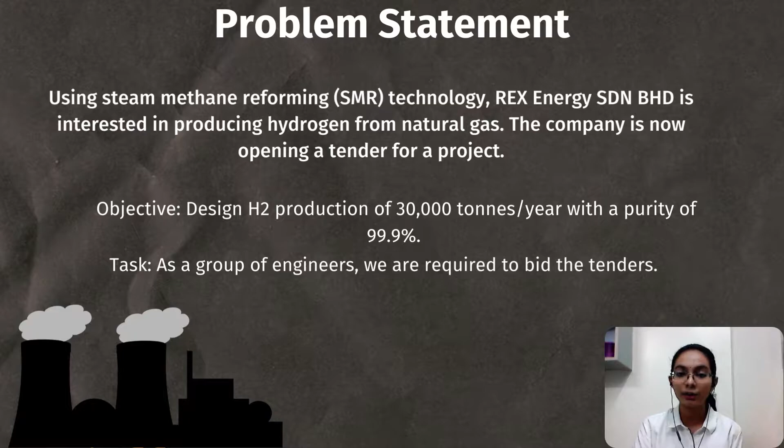Hi, I'm Monroe, and this is our overall system design to meet the specifications set by the company. We decided to use 2 packed bed reactors to produce the desired amount of hydrogen and 2 adsorption units to obtain 99.9% purity of hydrogen. Other unit operations such as heat exchanger, compressor, and valve are used to control the temperature and pressure of the stream so that the plant is working efficiently.

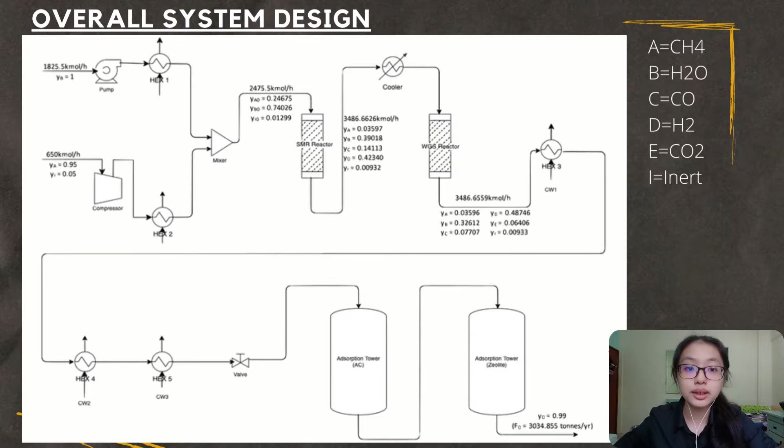In the SMR process, the use of catalyst is mandatory. Nickel-based catalysts assure an acceptably high activity and low cost. Nickel is one of the most widely used active phases in catalytic partial oxidation. It possesses a very high reactivity and low attrition, and can withstand a very high temperature. It also exhibits a good mechanical strength.

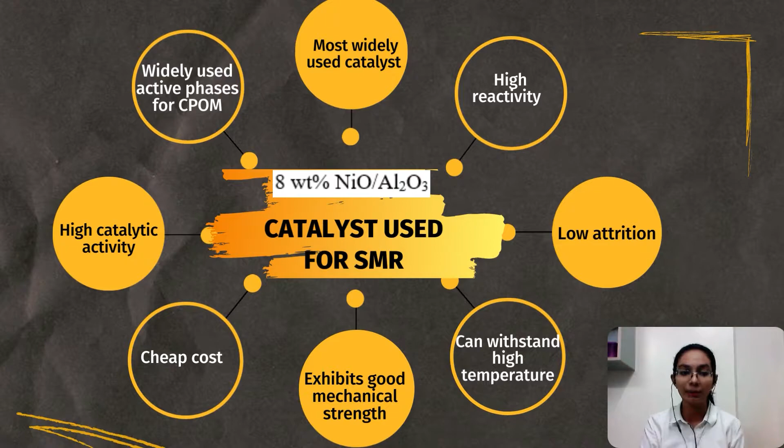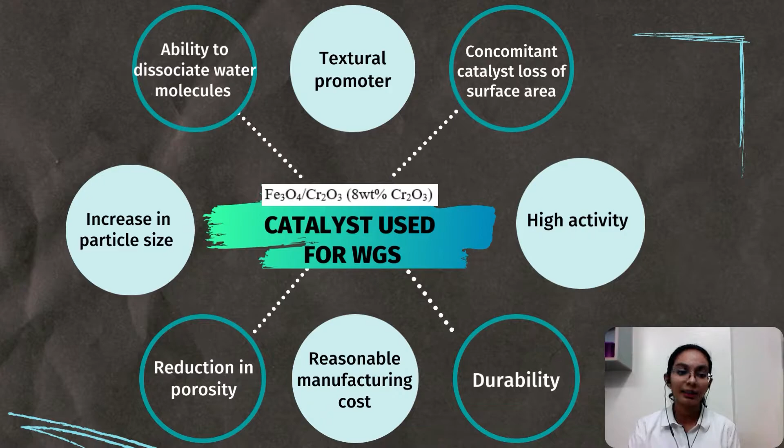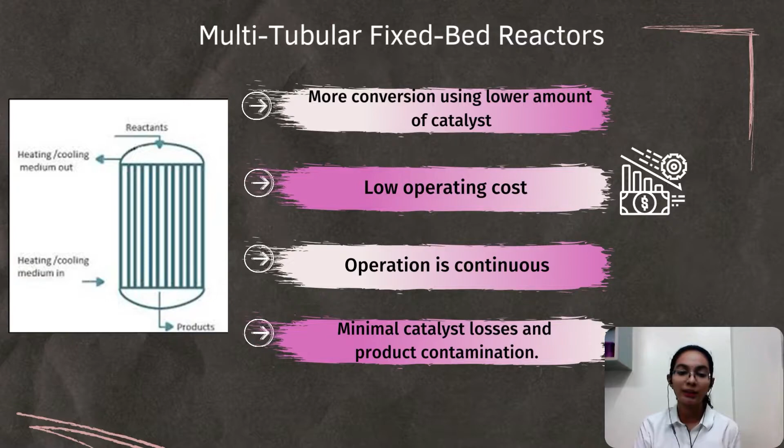The chromium in ferrochromium oxide in the high-temperature water gas shift catalyst has been used as a textural promoter to prevent thermal sintering of ferrous oxide. The ferrochromium mixed oxide catalyst is used because of its high activity, durability, and reasonable manufacturing cost. It also has the ability to dissociate water molecules. And the sintering of this catalyst leads to a lower surface area, reduction in porosity, as well as increase in particle size. The multitubular fixed-bed reactor, also known as the PBR, is used for both reactions because it has more conversion using a lower amount of catalyst, it has a lower operating cost, and the operation is continuous, as well as it has minimal catalyst losses and product contamination.

The strategy is to maximize the selectivity and yield of hydrogen, as well as to minimize the side reactions. First of all, we can increase the reaction temperature at constant pressure, because according to Le Chatelier's principle, an endothermic forward reaction favors a very high temperature condition, and the overall heat of reaction in this process is endothermic. So it requires more energy to be absorbed for the reaction to take place efficiently. Therefore, the methane conversion rate and hydrogen yield will increase with increasing reaction temperature at constant pressure.

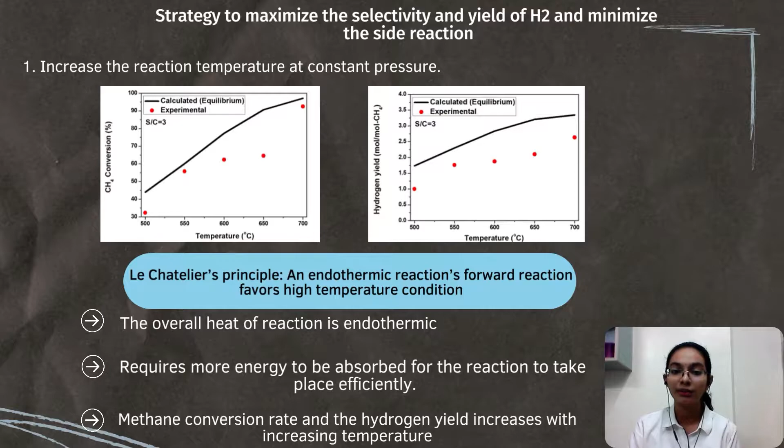Besides, we can also decrease the inlet pressure because according to Le Chatelier's principle, the increase in stoichiometric number in the reaction can be favorable at low pressure because the gas molecules of product are more than the reactant. Therefore, low pressure will favor the forward reaction. So, an increase in conversion of methane and greater hydrogen yield can be observed.

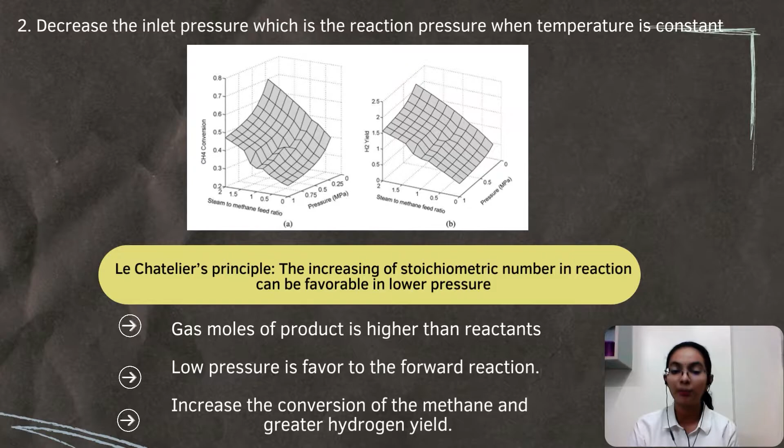Next, we can increase the steam to carbon feed ratio and carbon dioxide to carbon feed ratio because a positive effect on the WGS equilibrium, which favors the production of hydrogen as well as carbon dioxide, can be observed. It reduces the hydrogen partial pressure in the reaction zone, and a pure hydrogen flow rate can be recovered. Therefore, increasing the steam to methane ratio increases the hydrogen production by favoring the reforming reaction.

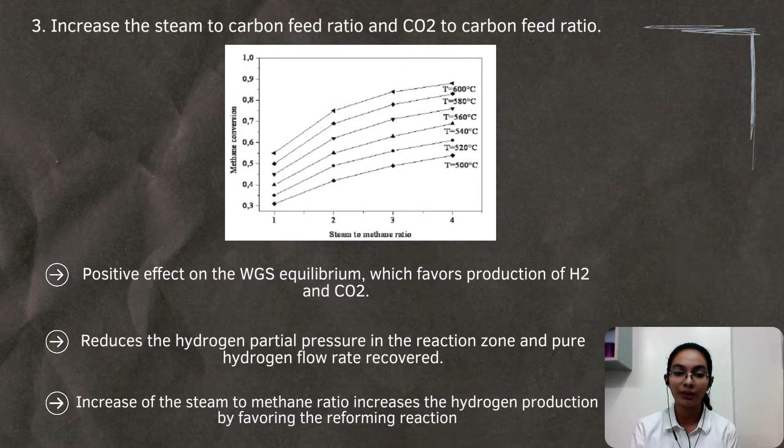So, how does the reactor separator system work for the SMR process? First of all, the natural gas stream is passed through the compressor, and water is passed through the pump. Water must be in the form of steam, and natural gas is heated up to a very high temperature. The hot natural gas and the steam are mixed in the mixer. Then, the methane reacts with the steam to produce hydrogen and carbon monoxide in the SMR reactor.

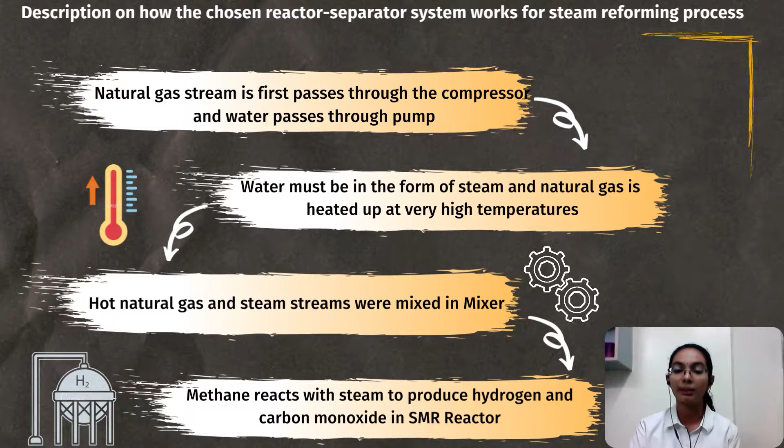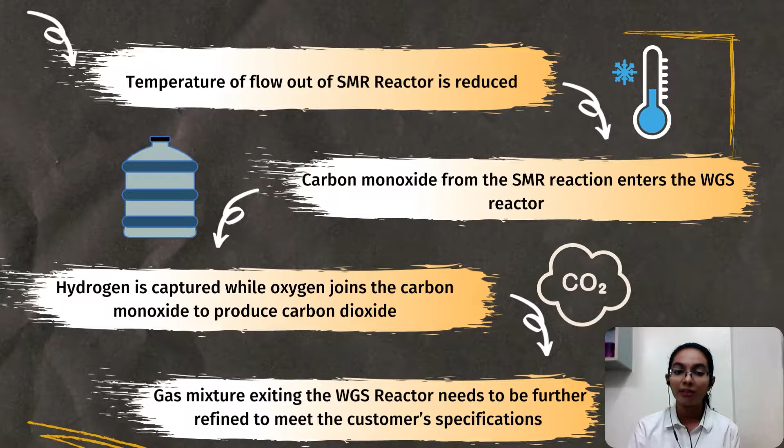After that, the temperature of the flow out of the SMR reactor is reduced. The carbon monoxide from the SMR reaction enters the water gas shift reactor. The hydrogen is then captured while the oxygen joins with the carbon monoxide to produce carbon dioxide. After that, the gas mixture exiting from the WGS reactor needs to be purified and refined to meet the customer specification. As introduced before, we decided to use 2 reactors in our design.

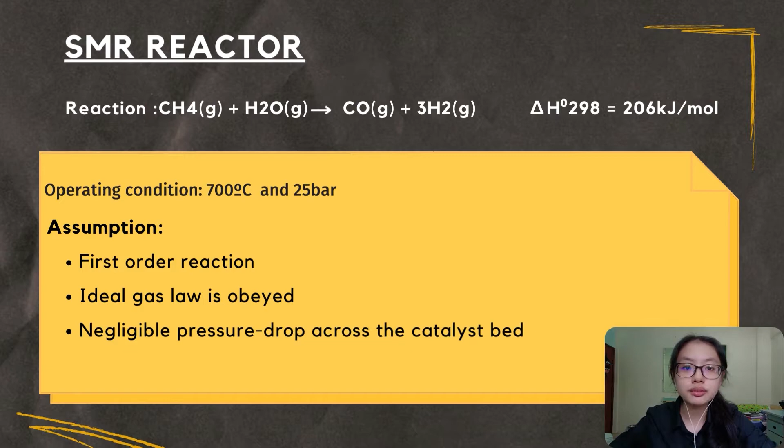In the first reactor, methane and steam react to form carbon monoxide and hydrogen. The reaction is endothermic, thus it operates at 700 degrees Celsius and 25 bar. Assumptions made are it is a first order reaction according to the literature, ideal gas law obeyed, and negligible pressure drop across the catalyst bed.

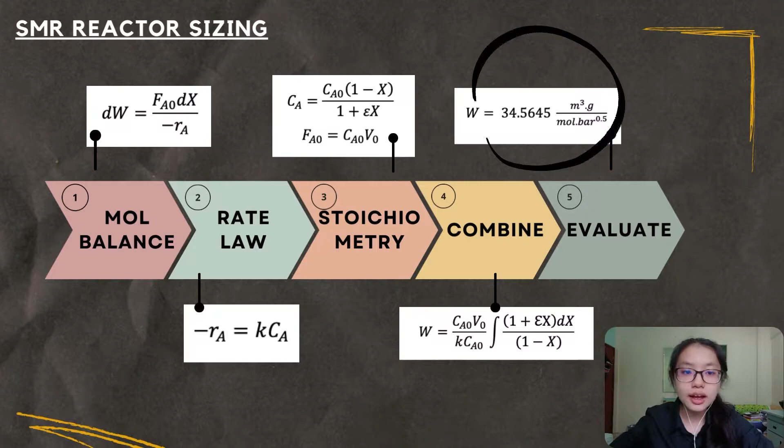Before calculating the flow rate and concentration of each component in the stream, volume expansion factor, conversion, and ratio between the reactants have been identified. A stoichiometry table is then constructed to calculate the flow rate and concentration of each component. To determine the reactor sizing, we follow the 5 steps. First, deriving the mole balance, the rate law, listing down the related stoichiometry equations, combining all the 3 steps, and evaluating it.

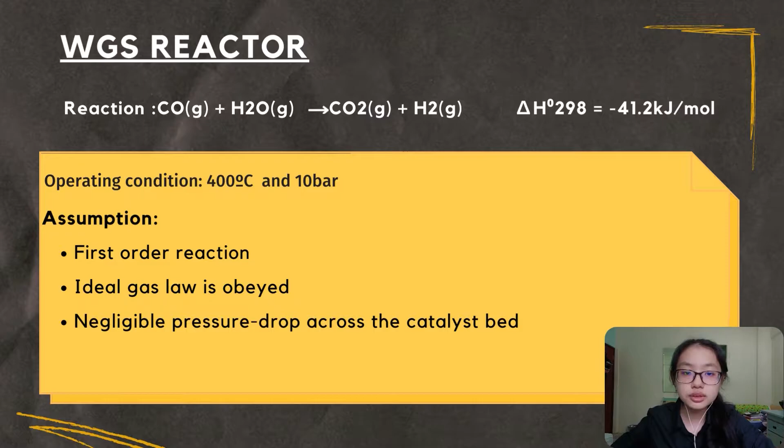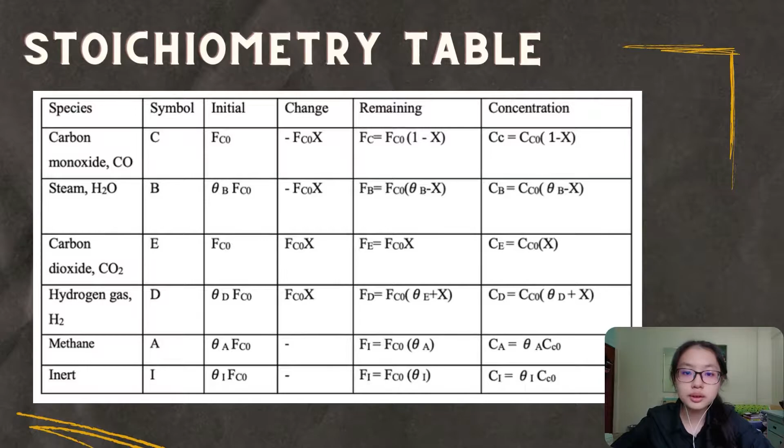Next, in the WGS reactor, carbon monoxide produced before reacts with the steam to produce hydrogen and carbon dioxide. The reaction is exothermic, thus it is operated at 400 degrees Celsius and 10 bar. We assume it is a first order reaction based on the literature. Ideal gas law is obeyed and negligible pressure drop across the catalyst bed. Volume expansion factor, conversion, and ratio between reactants have been calculated, and used to calculate the concentration and flow rate of each component based on the stoichiometry table. The 5 steps are again applied to determine the WGS reactor sizing.

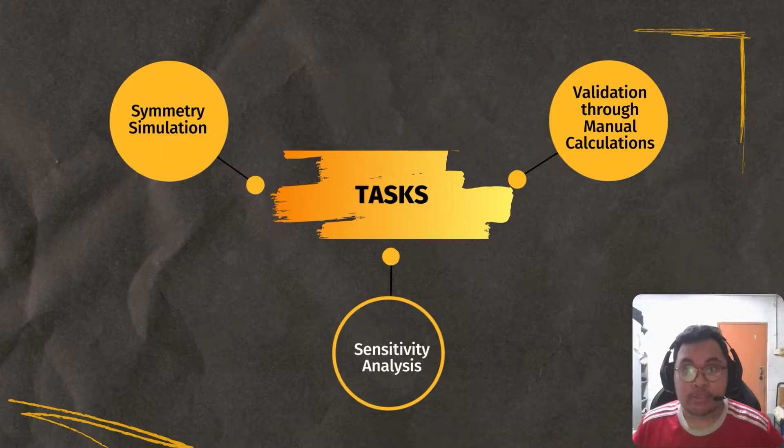For the process modeling and simulation part, we were asked to complete 3 tasks. First, we would have to simulate the steady-state reaction process using Symmetry software based on process parameters from the reaction engineering part. Next, we would need to validate the simulation by comparing with manual calculation and provide the deviation error between the simulation and the manual calculation. Lastly, using the case study function, we were assigned to perform sensitivity analysis by discussing the effect of several parameters on

the reactor performance. First, for the Symmetry simulation part, the non-ideal plug flow reactor, PFR, is the reactor used for the SMR reaction in the simulation, with the assumption that the packed bed reactor, PBR, behaves identically to the PFR. 1852.50 kmol per hour of water and 650 kmol per hour of natural gas supply with 95% methane are among

the feed streams. A pump transports the water stream before passing it through a heat exchanger, which elevates the temperature from 25 degrees Celsius to 1000 degrees Celsius at a pressure of 2050 kPa. The methane was pumped into the compressor, which increased the temperature to 300 degrees Celsius and 2500 kPa before passing it through the heat exchanger, which raised the temperature to 700 degrees Celsius.

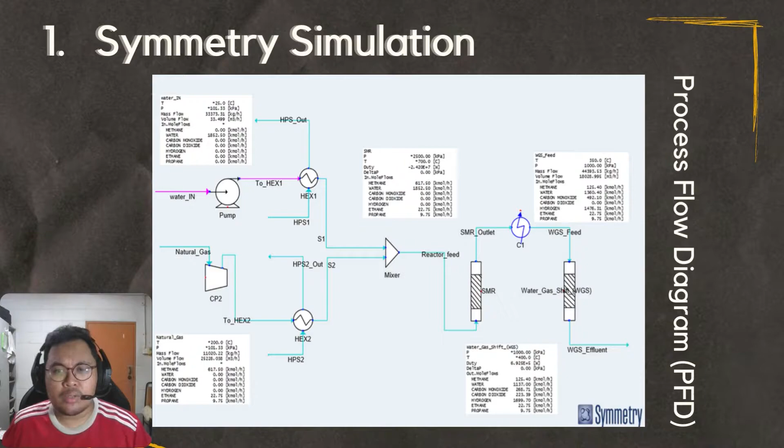The heat exchanger and natural gas exit streams are then sent into the mixer, allowing the input materials to interact. The mixed stream is then fed into the SMR and subsequently fed into a cooler. The cooler is then connected to the output reactor, or WGS PFR, lowering the temperature to 300 degrees Celsius, and we can determine the parameters in the outlet stream of the reactor.

For the second part, which is validation through manual calculation, the simulation of both reactors, which are SMR and WGS-PFR, were verified. SMR-PFR, for example, by using the parameters that were obtained through the reaction engineering part, as well as assuming the value of conversion, which is 0.83, we can determine whether the simulation is valid or not. By combining all these equations, which are the volume of SMR, rate law, and concentration of methane, we can get this final equation. Comparing the value obtained from this equation with the final concentration known from the simulation, we will get a deviation error of 1.98%.

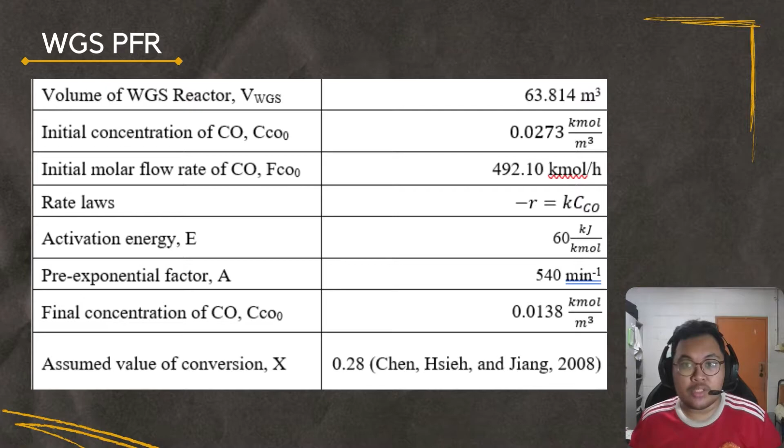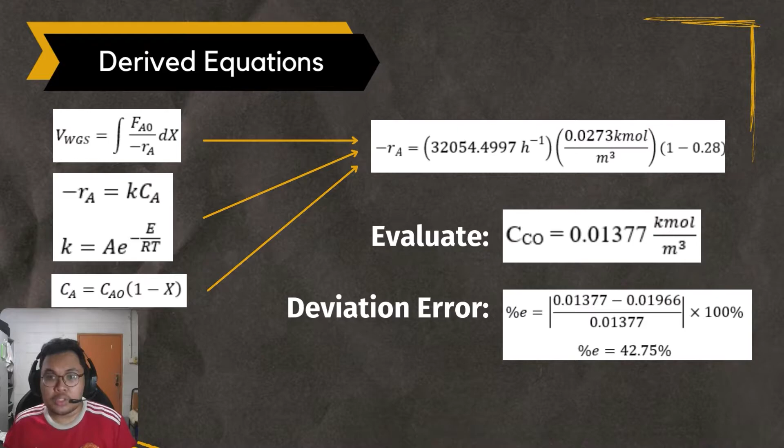For WGS-PFR, the steps to calculate the deviation error are similar to SMR-PFR. We will start off with the parameters as shown here that were obtained in CEB 2043 along with the assumed conversion value, which is 0.28. Combining all these equations, we will get the final equation. Compare the value gained with the final concentration of carbon monoxide from the simulation, which is 0.01966 kmol per meter cube. We will get a deviation error of 42.75%.

Lastly, for the sensitivity analysis part, several parameters have been studied based on the simulation to better understand the impact they have on the reactor's performance. The independent variables for this topic are pressure, temperature, and feed composition. Meanwhile, the mole fraction of produced hydrogen and mass flow rate of hydrogen product at the outlet stream are employed as metrics to assess the reactor's performance.

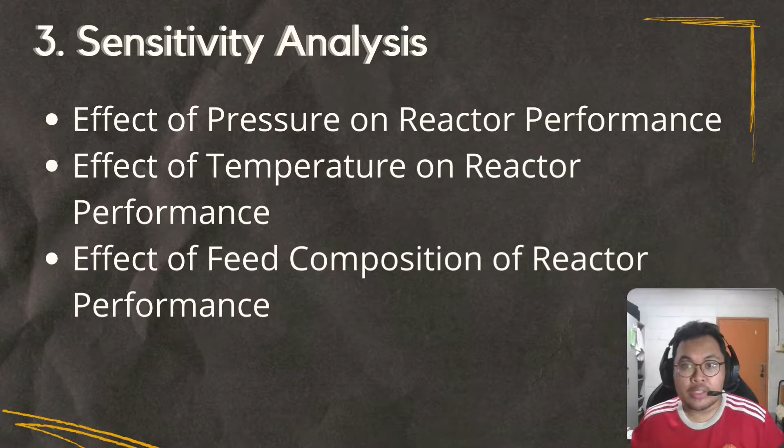The effect of the first parameter, which is the inlet pressure of natural gas, on the outlet mole fraction of hydrogen product was studied. As you can see in the graph, the entrance pressure of natural gas is directly proportional to the output mole fraction of product hydrogen. The mole fraction of hydrogen will grow when the pressure of natural gas increases. Natural gas, or the methane, consumption is favored in a high pressure zone in the membrane reactors. As pressure rises, natural gas consumption rises, resulting in an increase in hydrogen production.

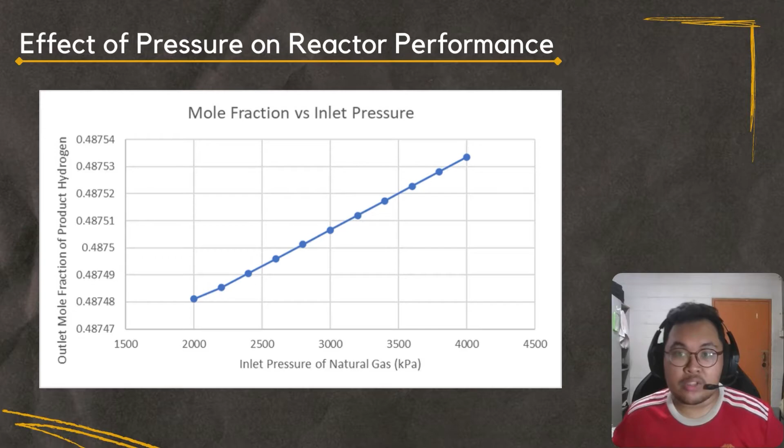Next, the effect of inlet temperature of natural gas on outlet mole fraction of hydrogen product was studied. The input temperature of natural gas is directly proportional to the output mole fraction of product hydrogen. The mole fraction of product hydrogen will grow as the temperature of natural gas rises. High temperature encourages hydrogen generation in both conventional and membrane reactors. As the temperature rises, the average kinetic energy of molecules rises as well, resulting in more effective collisions. It also cuts down on the time it takes for molecules to reach the minimal kinetic energy required to overcome the activation energy. As a result, the mole fraction of hydrogen increases as the temperature rises.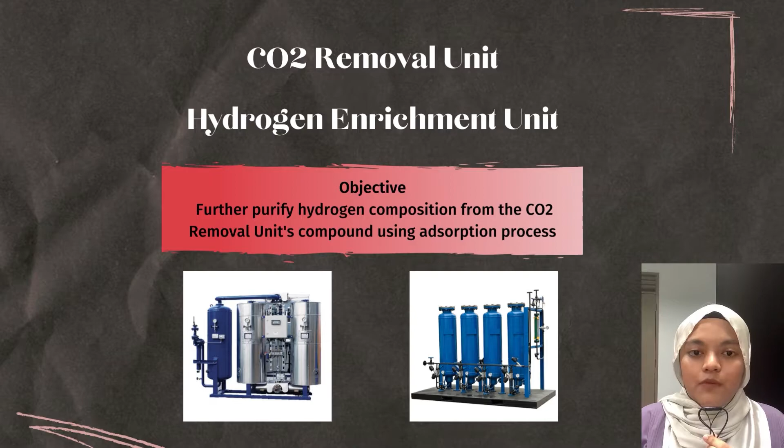The adsorption column is used in the hydrogen enrichment unit to further purify hydrogen composition from the compound stream. The carbon dioxide removal unit's compound will be transferred to the hydrogen enrichment unit, where unwanted components will be removed using the adsorption process. The light and heavy unwanted components that remain in the stream can be removed based on different adsorbents. As a result, the natural gas can yield a higher percentage of hydrogen.

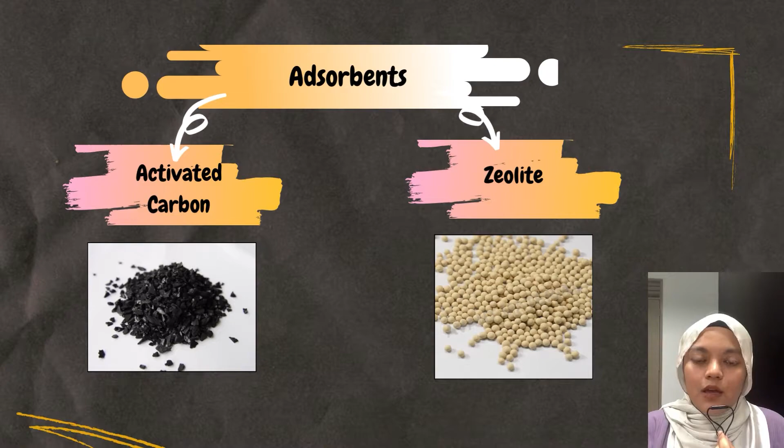Water, carbon dioxide, carbon monoxide, hydrogen, and methane are all present in the gas stream when it enters the adsorber. Therefore, two types of adsorbents will be used to enhance hydrogen generation with a purity of 99.9% by eliminating the unwanted compounds. The first adsorbent is activated carbon, and the second adsorbent is zeolite. The hydrogen enhancement plant's first adsorbent will be activated carbon.

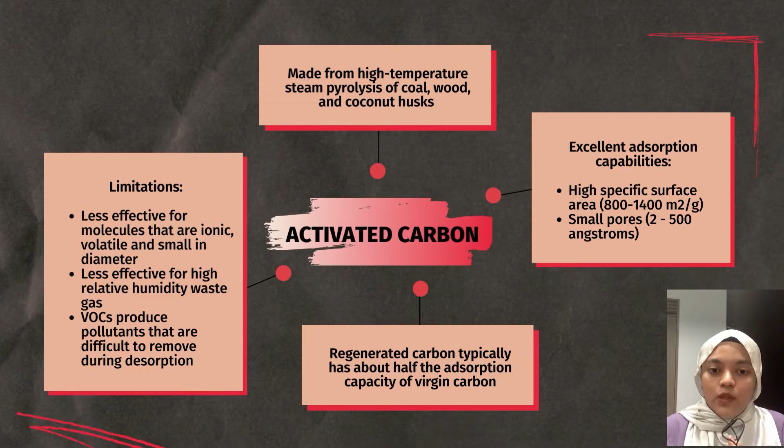The characteristics of this adsorbent are that it has small pores of various sizes, typically between 2 and 500 angstrom, and high specific surface areas of between 800 and 1400 meters squared per gram. The advantages include lower cost and suitability for waste streams containing a wide range of VOC. Meanwhile, the disadvantages are that it is not effective for VOCs with high polarity, not effective for highly volatile compounds, has a high annual cost for regeneration when used for concentrated waste streams, and degrades during desorption cycles.

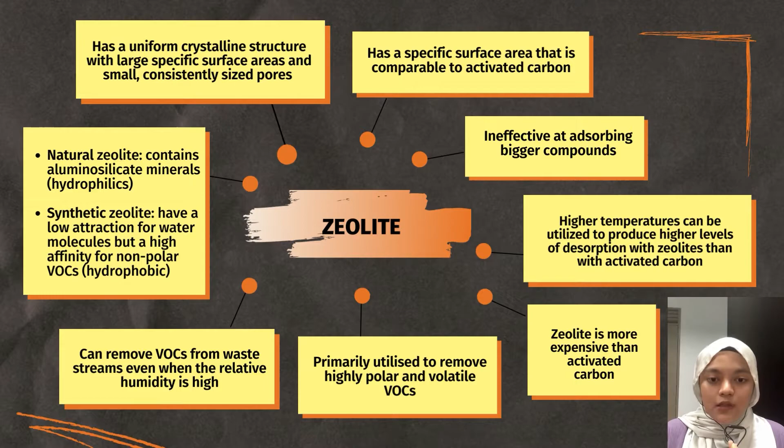The second adsorbent will be zeolite. The characteristics of this adsorbent are that it has uniform crystalline structures with uniform pores. The pores are smaller than those in activated carbon, and it also has specific surface areas comparable to activated carbon. The advantages of zeolite include that it is highly selective for VOC removal, good at removing small, highly polar and very volatile compounds, has a longer life, and is less susceptible to degradation. Meanwhile, the disadvantages include higher initial cost and not being suitable for waste streams containing wide ranges of VOC.

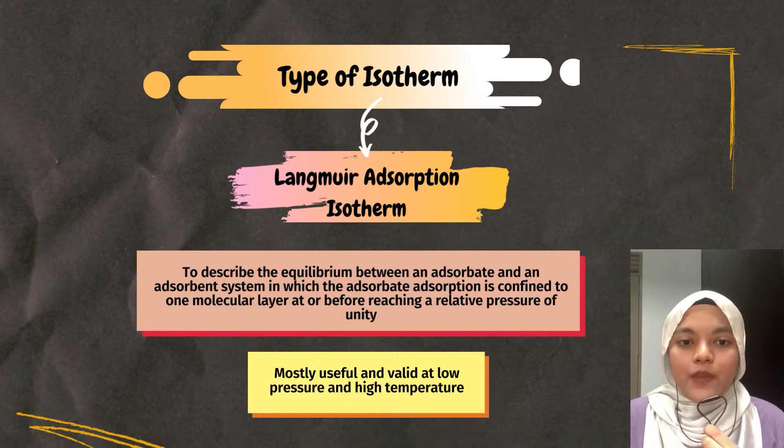The type of isotherm that fits the adsorption equilibrium data is the Langmuir adsorption isotherm. The Langmuir adsorption isotherm is used to describe the equilibrium between an adsorbate and an adsorbent system in which the adsorbate adsorption is confined to one molecular layer at or before reaching a relative pressure of unity. Langmuir isotherm is chosen as it is mostly useful and valid at low pressure and high temperature.

The product stream from the reactor contains a few components, thus the type of components should be considered while determining the model's isotherm. We identify the concentration of adsorbate in solid, heat of adsorption, and adsorptive pressure for each component from the experimental data to compute the isotherm of each component in the adsorber.

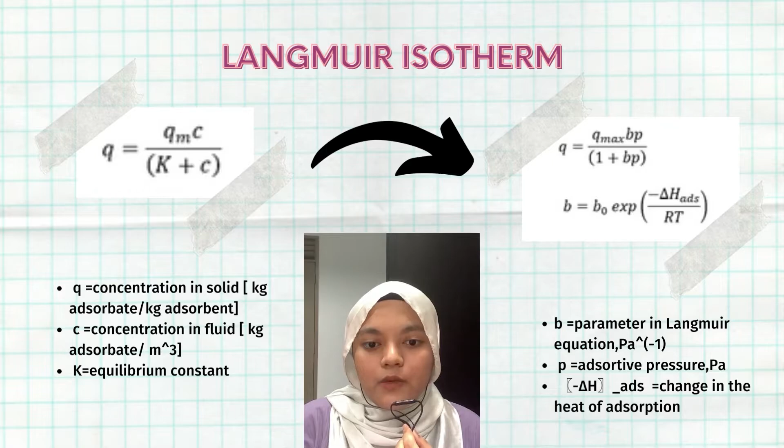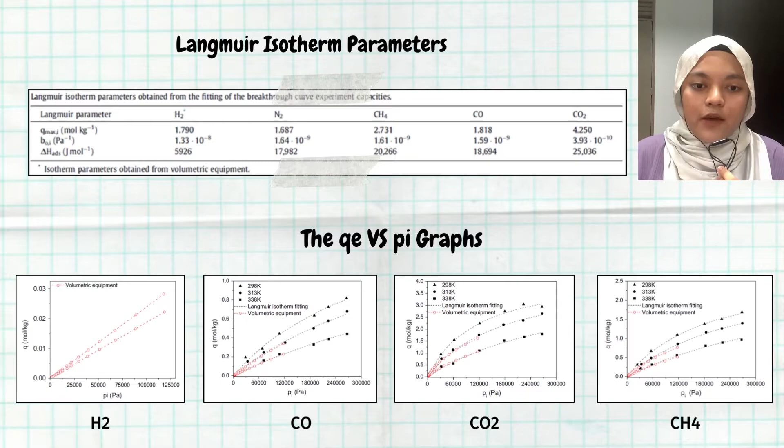Therefore, as you can see from all these graphs from the journal reference, the majority of the components in the adsorber follow the Langmuir isotherm. The Langmuir isotherm was used to fit the adsorption capacities acquired from the various feed components, and it was discovered that carbon dioxide is the most adsorbed gas, followed by methane, carbon monoxide, and then hydrogen.

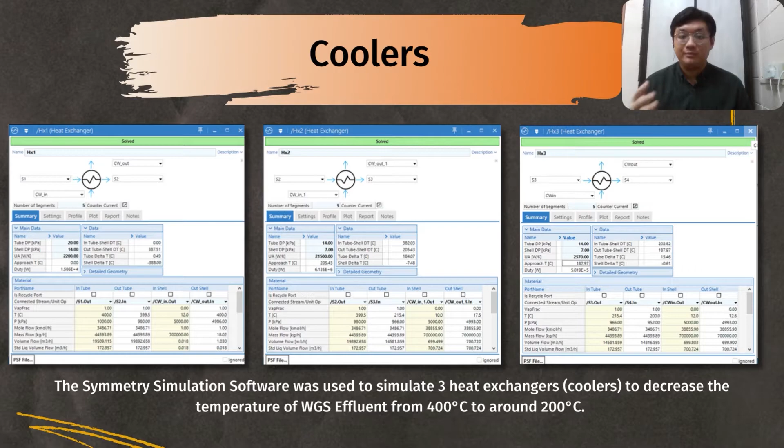Firstly, 3 coolers were used to decrease the temperature of the WGS effluent from 400 degrees Celsius to around 200 degrees Celsius. Now this is done to ensure that the temperature meets the working temperature for activated carbon. A valve was also used to reduce the pressure of the WGS effluent from 952 kilopascals to 100 kilopascals, which is the desired pressure of 1 bar.

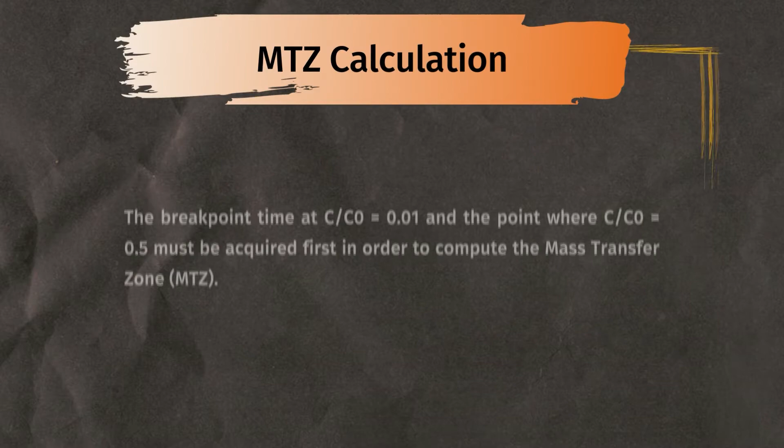After that, the mass transfer zone, or MTZ, is calculated for each column by first acquiring the breakpoint at breakpoint concentration C/C0 equals 0.01 and the point where C/C0 equals 0.5. So let us take a look at the case of activated carbon. After obtaining the values for TB and TS from the breakthrough curve, the used bed length HB was calculated. Then, the unused bed length HUNB was calculated by subtracting HB from HT.

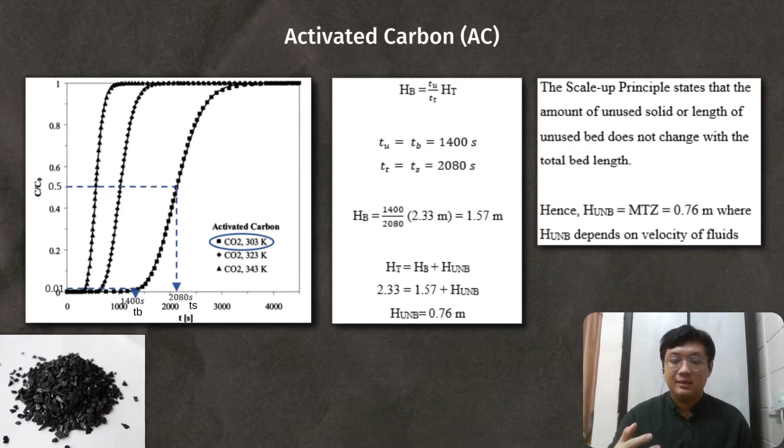So at this point, the scale-up principle is applied. This principle states that the amount of unused solid, or length of unused bed, does not change with the total bed length. Therefore, HUNB equals MTZ, which is calculated as 0.76 meters, where HUNB depends on the velocity of fluids. The same calculations and explanations are used in the case of the zeolite adsorbent.

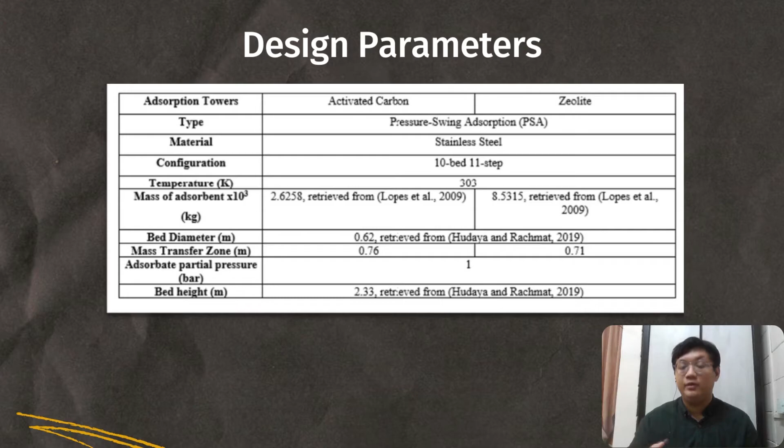In the design parameters, both adsorption column types are PSA. They are also made from stainless steel, and the configuration is 10 beds 11 steps. This is so that a high purity of hydrogen gas can be obtained at the outlet. Now the rest of the remaining parameters are obtained from literature.

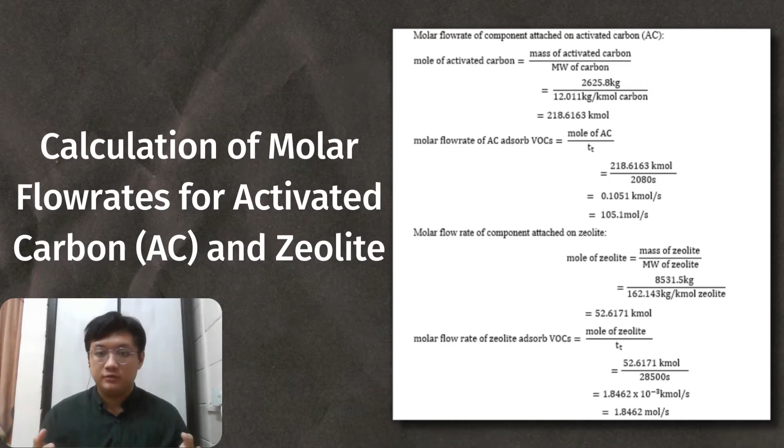The next step taken is the calculation of molar flow rates for AC, the activated carbon, and zeolite. This is done as follows, so that it can be used in the mass balance subsequently. Before conducting the mass balance for the adsorption columns, the purity of hydrogen at the outlet streams is first obtained from a journal by Riboldi and Bolland.

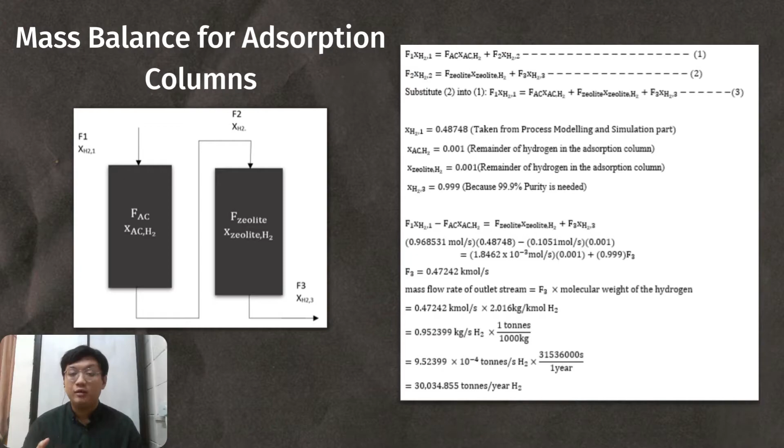Alright, so now we have reached the point where we calculate the mass balance for the adsorption columns. The first step is to develop the equations. Then substitute the values into the mass balance equations. At this point, F3 is multiplied by the molecular weight of hydrogen, and by unit conversion as well as by the number of seconds in a year, we can finally obtain the amount of hydrogen required per year.

Now that we have reached the amount of H2 production required per year, we will be explaining the ways or strategies that can be used to achieve that 99.9% purity of H2 production. Firstly, we can increase the pressure of the feed. Gases will tend to adhere to the adsorbent surface at high pressure. This is because of the increase in the force acting between the gas molecules and the adsorbent material. Now, because sustaining excessively high pressure conditions is expensive, pressures should be kept at moderate levels.

Next, increase the number of adsorbent beds. That way, more solids can be adsorbed in the process, which in turn increases the purity of hydrogen. This is because the increase in bed number also increases the contact area between adsorbate and the adsorbent. Finally, we could conduct a recycling process by regeneration. Regeneration is required to overcome the activated carbon's capacity limit and allow it to work effectively in a continuous process.

Regeneration of activated carbon is a thermal processing method for removing adsorbed elements from the surface of the activated carbon. To compensate for the losses, the equivalent amount of fresh activated carbon must be added when waste carbon is regenerated.

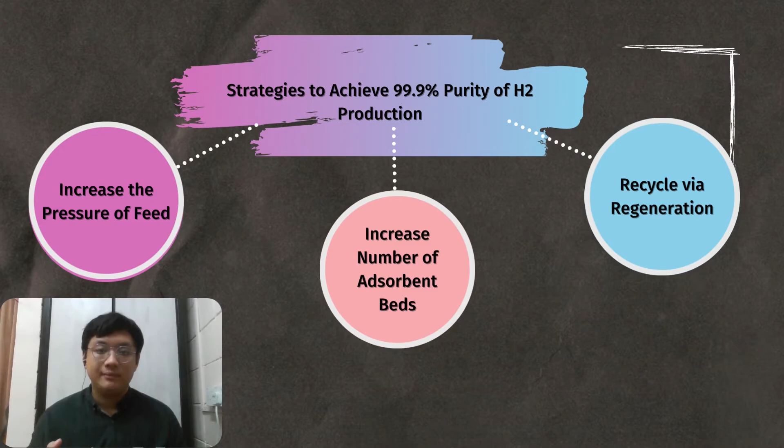The project to design a hydrogen production system on a big scale of 30,000 tons per year with a purity of 99.9% by utilizing SMR technology has been successfully done. The main objective of the design is to have a higher conversion of natural gas to produce more hydrogen. Besides, the plant design also needs to comply with economic feasibility.

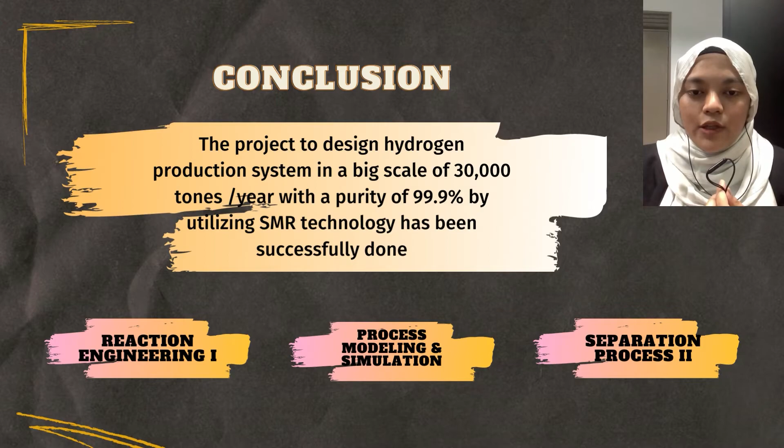In designing this process plant, chemical engineering knowledge has been applied throughout this project, which includes reaction engineering 1, process modeling and simulation, and separation process 2. The reaction engineering course plays a vital role in optimizing the reactor's design for the reactions that occur in the steam methane reforming process. As a recap, the SMR technology consists of two main chemical reactions, the first one is the SMR reaction and the second one is the WGS reaction.

The type of catalyst chosen for the first reaction is a nickel-based catalyst, and for the second reaction, an iron-chromium mixed oxide catalyst. Besides, the type of reactor chosen, after considering the type of catalyst and phase involved, is the multi-tubular fixed bed reactor. The packed bed reactor (PBR) is the most ideal for the stated reactions. The calculation of the reactor sizing, flow rate, and concentration of each stream has been carried out based on the mole balances in terms of conversion, rate law, and stoichiometric concepts to obtain the appropriate sizing.

Besides, the strategies suggested to maximize the selectivity and yield of hydrogen and minimize the side reaction include increasing the reaction temperature at constant pressure, decreasing the inlet pressure, which is the reaction pressure when temperature is constant, and increasing the steam to carbon feed ratio and carbon dioxide to carbon feed ratio.

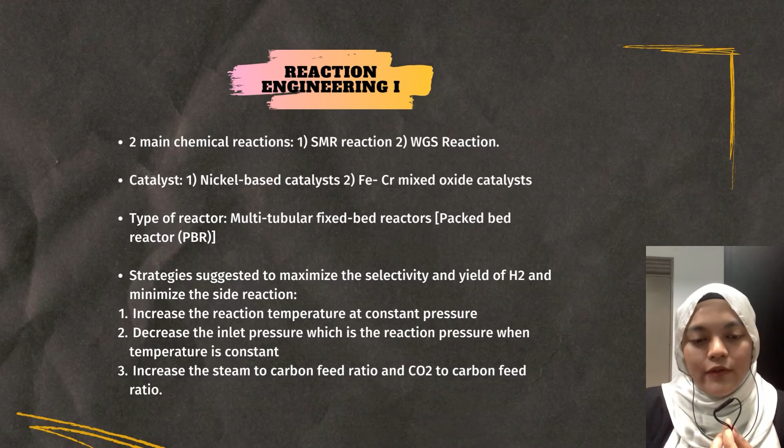Next, the process modeling and simulation was run using the Symmetry platform to optimize the steam methane reforming process. However, due to the software's limitations, various assumptions were made in the simulation. The non-ideal plug flow reactor (PFR) is the reactor used for the SMR reaction in the simulation, with the assumption that the packed bed reactor (PBR) behaves identically to the PFR. In plug flow reactors, the steam methane reforming (SMR) and water gas shift (WGS) processes were modeled.

Several parameters have been studied based on the simulation in order to better understand the impact they have on the reactor's performance. The independent variables are pressure, temperature, and feed composition. Meanwhile, the mole fraction of produced hydrogen and mass flow rate of hydrogen product at the outlet stream are employed as metrics to assess the reactor's performance. Based on the sensitivity analysis done, this conclusion can be made: the higher the pressure and temperature, as well as the molar fraction of natural gas at the inlet feed stream, the overall amount of hydrogen produced will also increase, hence a higher yield of hydrogen can be obtained.

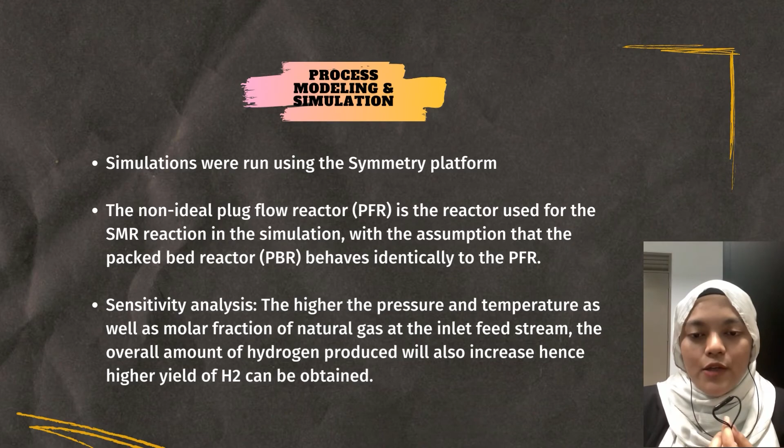Lastly, for the separation process, an absorption unit is utilized to separate carbon dioxide from the gas mixture, which is the effluent stream of the water gas shift reactor. A pressure swing adsorption (PSA) unit is used for the removal of carbon dioxide, methane, carbon monoxide, and water from hydrogen. The adsorption column is used in the hydrogen enrichment unit to further purify the hydrogen composition from the carbon dioxide removal unit compound stream, where unwanted components will be removed using the adsorption process.

Two types of adsorbents are used to enhance hydrogen generation, the first one is activated carbon and the second one is zeolite. Moreover, the type of isotherm that fits the adsorption equilibrium data is the Langmuir adsorption isotherm. For the adsorption column design, the total height of the adsorption column was taken as 2.33 meters and the diameter is 0.62 meters, based on our journal reference. From the calculation, the mass transfer zone and LUB are 0.76 meters and 0.71 meters for activated carbon and zeolite adsorbents respectively.

For this project, we successfully managed to produce 30,000 tons per year of hydrogen via SMR technology. The exact mass flow rate of our outlet stream is 30,034 tons per year of hydrogen. In addition, some strategies to achieve 99.9% purity of hydrogen production are also suggested. This includes increasing the pressure, increasing the number of adsorbent beds, and recycling via regeneration.